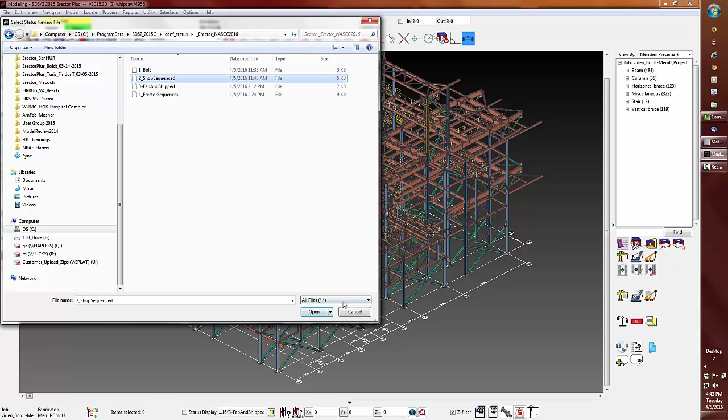Let's begin with viewing the original fabrication sequences. Unfortunately, in many cases these sequences will need to be modified or broken down when it comes to the field. With the status filter, we can see which members have already been fabricated and shipped. After determining the erector sequence, we may need to reveal our new plans to the fabricator so we can get the steel on site in a timely manner.

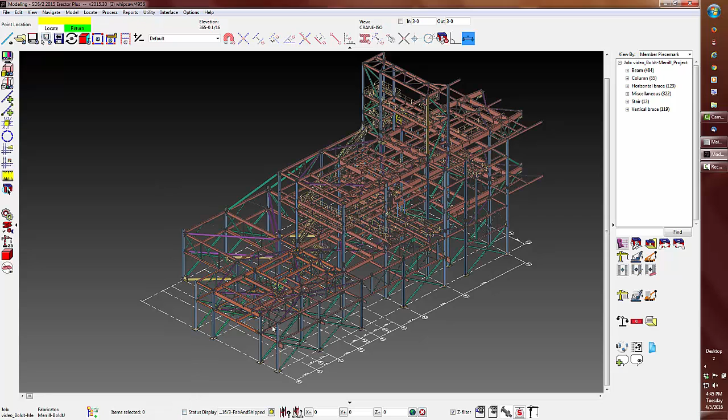I'll begin by looking at this frame to see which members may be attached to the assembly. We see the beams at the top where the shop attached this frame, as clearly indicated by the highlighting or the green selection. Let's review the assembly with a double click.

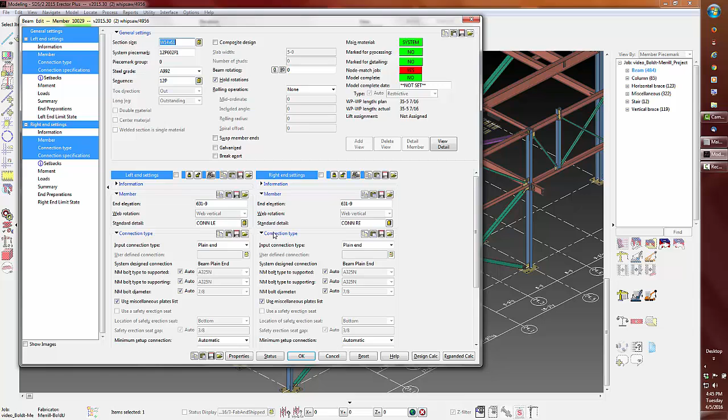All items can be reviewed with a double click. I can also from this location quickly review the 2D drawing or erection view drawing, or by using any of the assorted available tools. I'm using Bluebeam, which permits me to mark up these drawings.

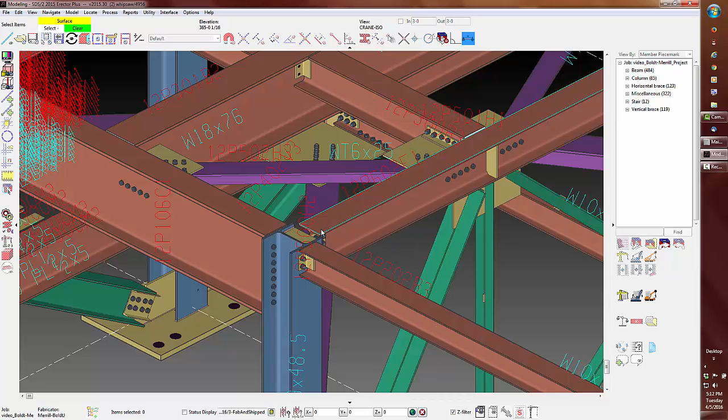By snapping to the surface of the member, I'll determine the center-to-center distance to the beam, showing that the dimensions can be directly taken from this model. Since I'm here, let's run a summary of the field bolts on this particular frame.

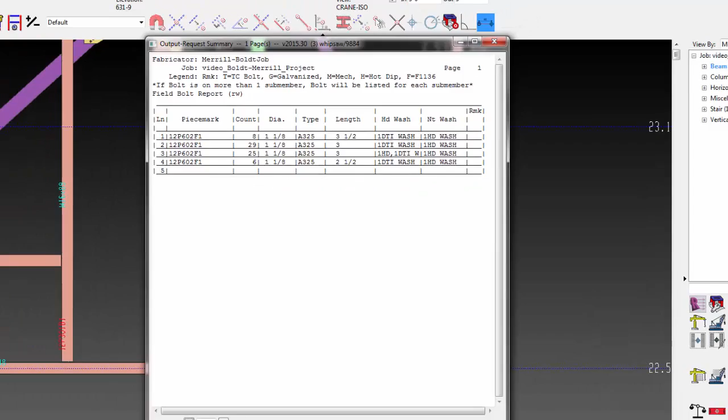By loading this pre-saved status filter, you can see in orange any bolts that are 1 1/8 inch diameter. Note, the gray bolts are those that are field bolts shipped with the brace. We'll come back to this with a point-to-point list that can be used to sign off on connections.

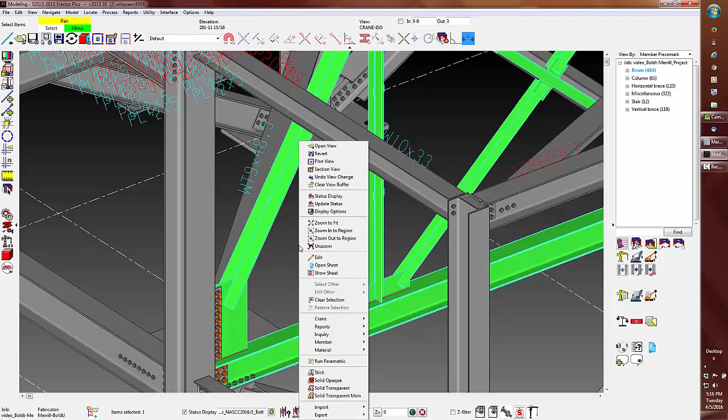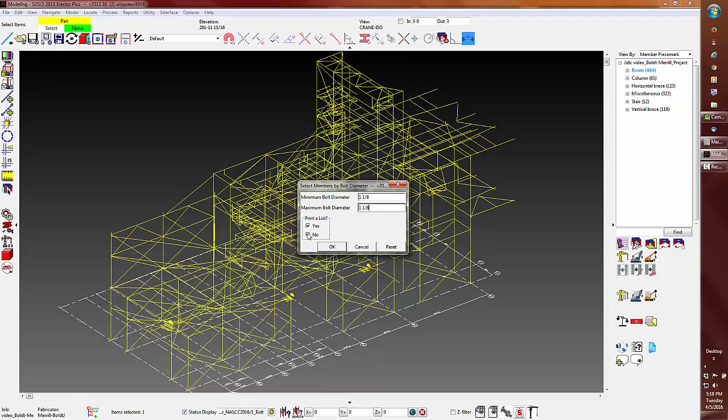Members in SDS2 can easily be turned into solid form, transparent, or stick. I'm going to run a tool that will select members with 1 1/8 inch diameter bolts. We can see the list of members that contain the 1 1/8 inch diameter bolts and the selected members in the model. When looking for type and length, you can always double-click the bolts, but we'll generate a point-to-point list instead to get that data.

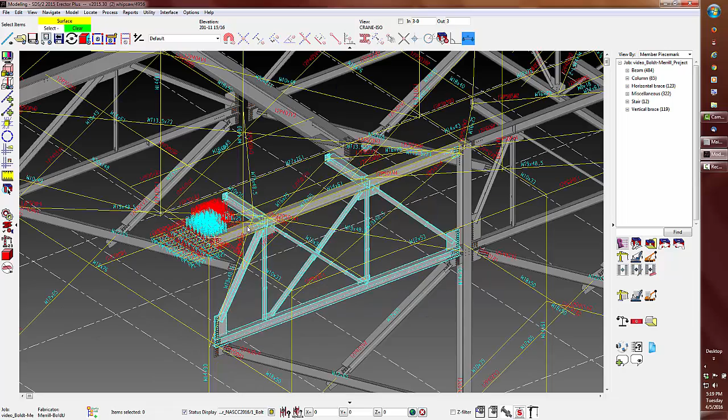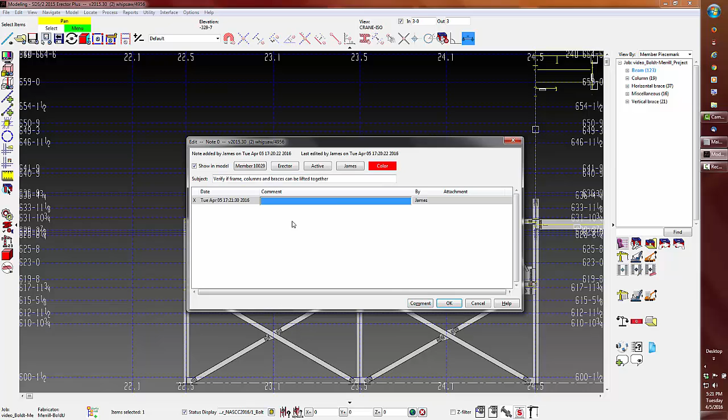Now I will add a note with an attachment to this frame. Note how you can find the note in the note viewer, and the view will zoom to the view location.

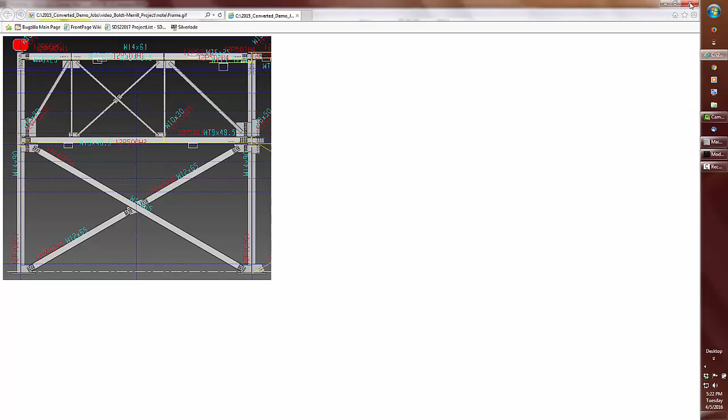I will now create some erector sequences by first selecting the members that I would like in the sequence. Then I will save the selection for later use and finish by applying the sequence to the selected members.

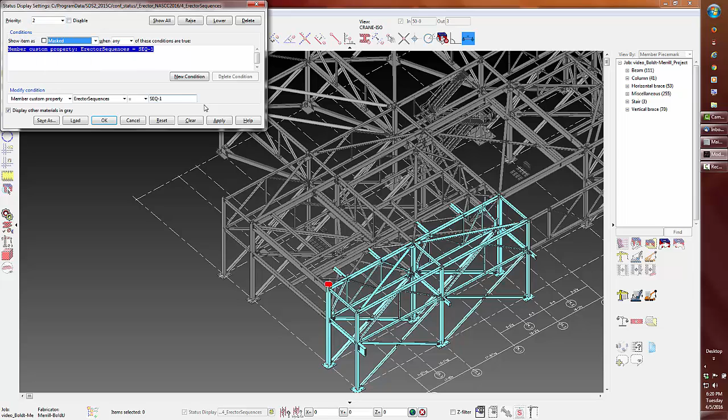I will now load a pre-created status configuration that will show each erector sequence by color. Then I'll modify this and change it so that it will hide anything in the erector sequence, in this case sequence 1.

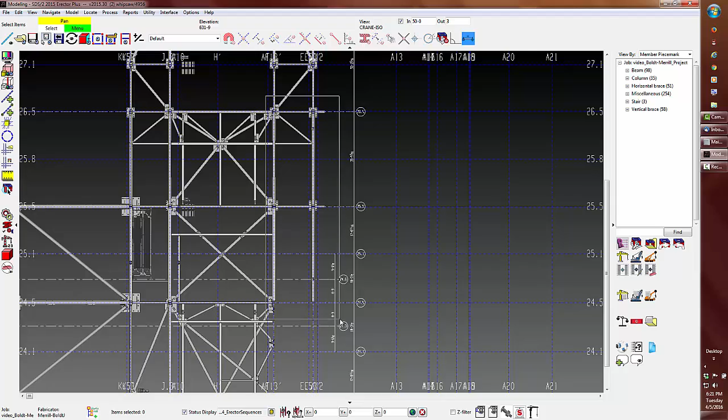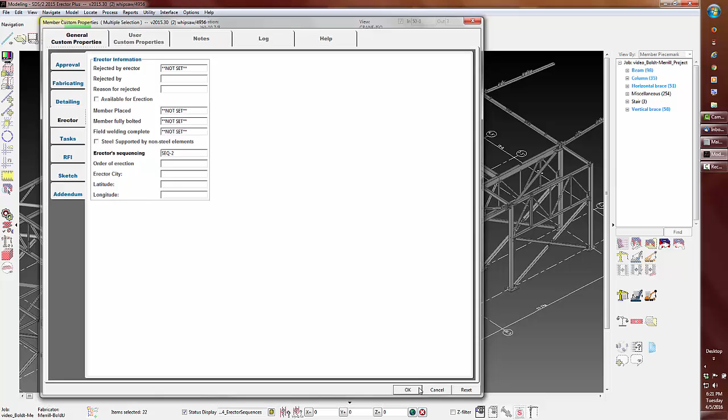Let's go ahead and create erector sequence 2. I'll finish by turning erector sequence 1 back to cyan.

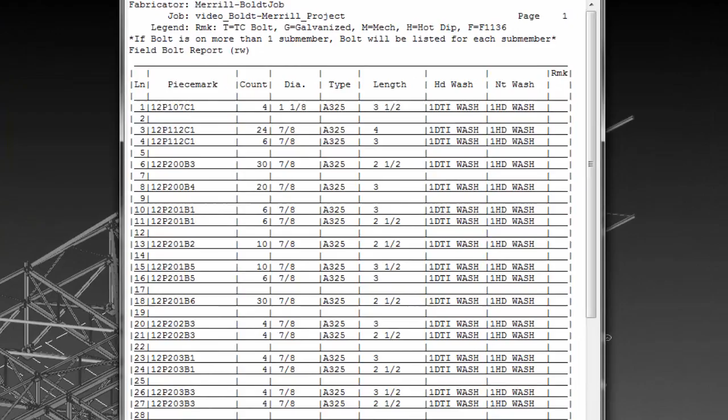Time to extract some more data for the field for this work package. First, I'll get a report of the field bolts required per sequence. Then a field bolt point-to-point, which can be used for signing off on the connections. Let's finish with a list of members in the erector sequence for the shop and the field.

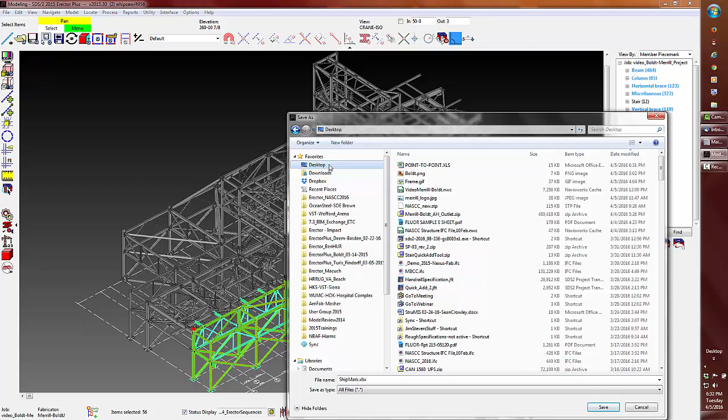Let's go ahead and sort this list.

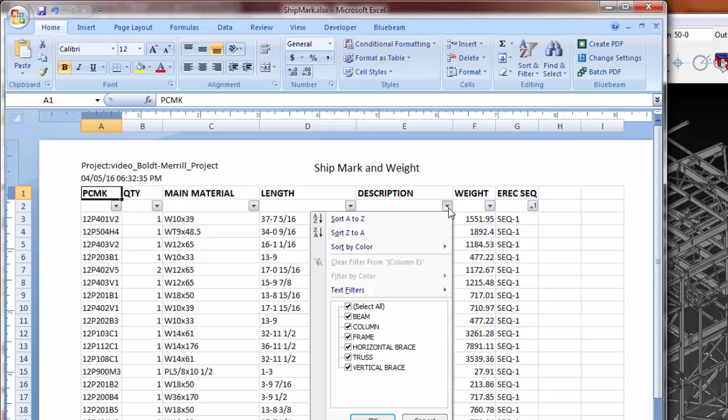I will now create a colorized 3D PDF for the field of erector sequence 1 and 2, plus a few surrounding members. Of course, you can do the entire model or just each sequence—that is up to you.

I'd like to point out how you can find members in the PDF model or the tree. You can also modify your view.

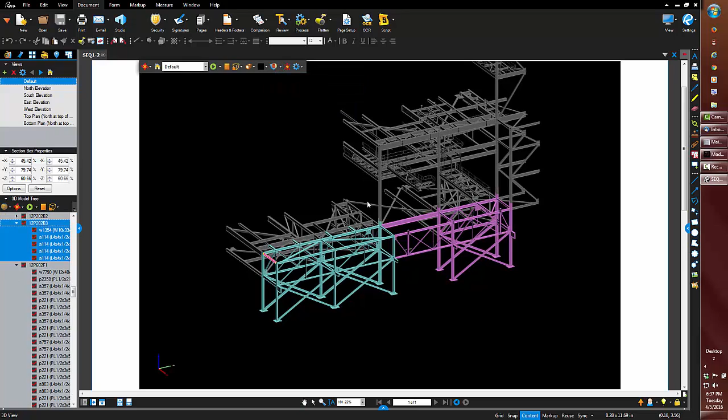The U3D can also be read on a tablet with the installation of a 3D U3D PDF reader.

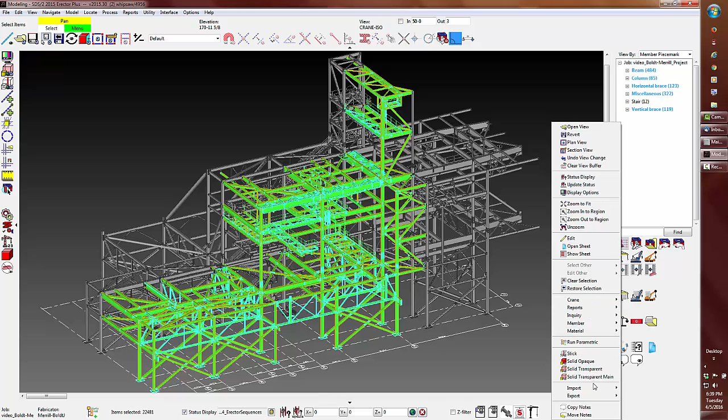I will finish this section by creating an IFC for my collaborative modeling software, such as Navisworks, BIM 360 Glue, Tekla BIMsight, Trimble Connect, etc. I'm going to not send the bolts and welds in the IFC just to reduce the size of the file. Note, you can also send the center of mass or gravity in this export. You'll notice all the data that is packed into this IFC.

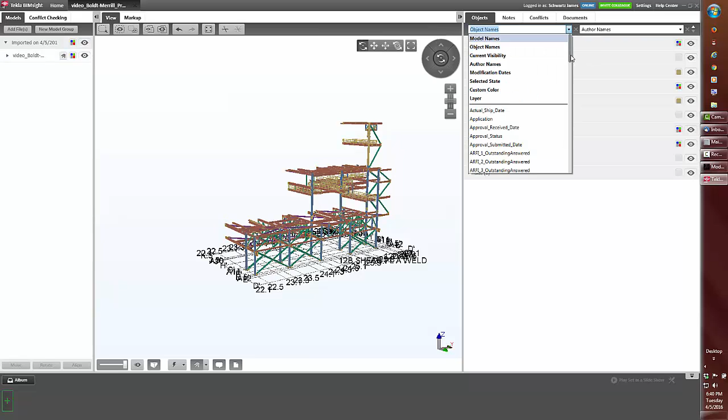I'm now working in Tekla BIMsight. Here are the sequences, the erector ones that we created. You can even create a workflow video from your collaborative modeling software if that is supported.

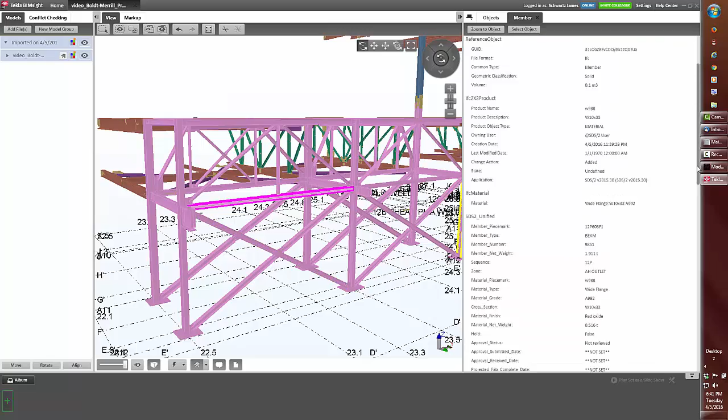This will conclude this video.